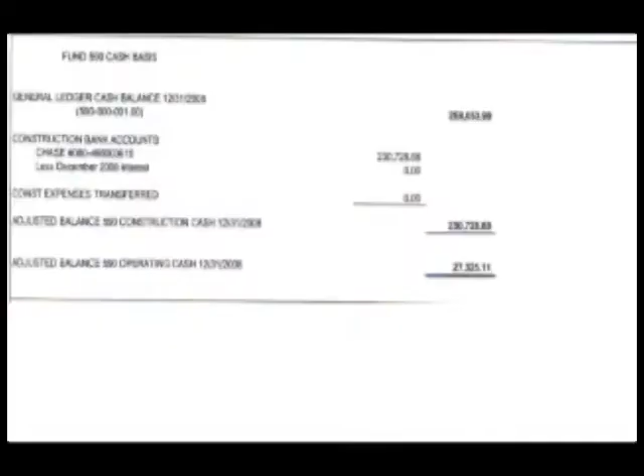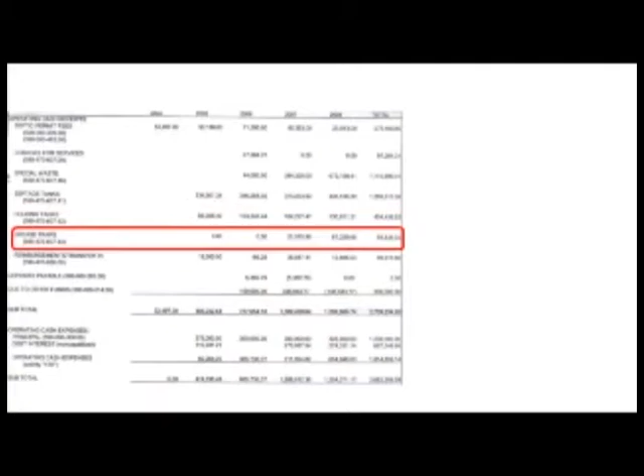The septage facility had some real problems during construction, but now it's online and is taking wastes from groundwater contaminations, septage tanks, holding tanks, and grease traps. The facility is located at the top of Lafreniere Hill, right next door to the County Road Commission. The remainder of the video has to do with why the project was necessary and how the facility itself actually works.

I'm Fred Kiesler, Health Officer, Grand Traverse County Health Department. A little of the history behind the septage plant was the need for one. Back in the 80s, early 90s, it was recognized that we were running out of places for disposal of septage, that is, the waste from septic tanks. Back at that time, the sewage treatment plant was discouraging the disposal of that waste because it could cause problems for the plant.

So they had gone to land application, that is, dumping the septage onto the land and then disking it in. A lot of people were concerned about that: the effect on the groundwater, runoff into surface bodies of water, and just a little bit of a not in my backyard issue. When there was application for a septage disposal site in the southern part of the county, there was quite an uproar of the community, the people not wanting it there.

And when the townships banded together to discuss this issue of what to do with septage, the health department certainly supported the notion that there be a common place where the septage could be disposed of. Wasn't there a state law that changed that suddenly made it a lot more difficult to dispose of the septage?

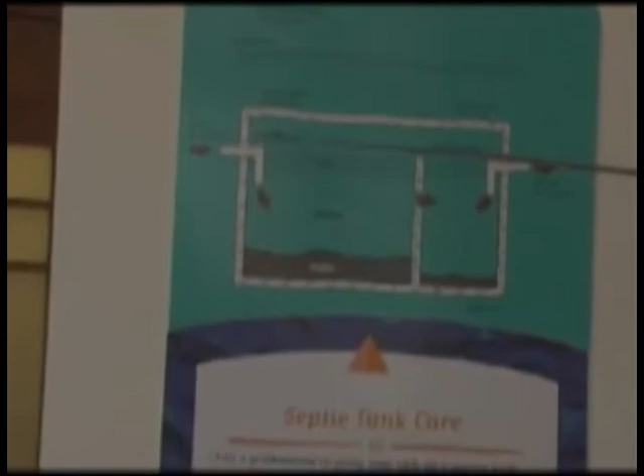Okay. The first diagram that we have shows a cross-section of a septic tank. And if you look over here, you can see that the waste that comes from the house, which is liquid and solid, comes into the system and will essentially deposit inside the tank.

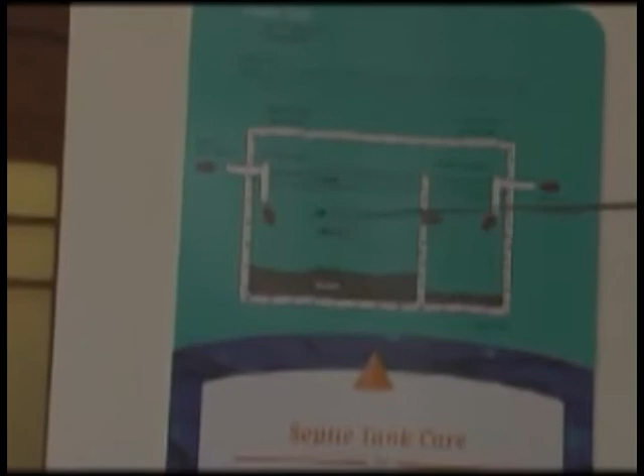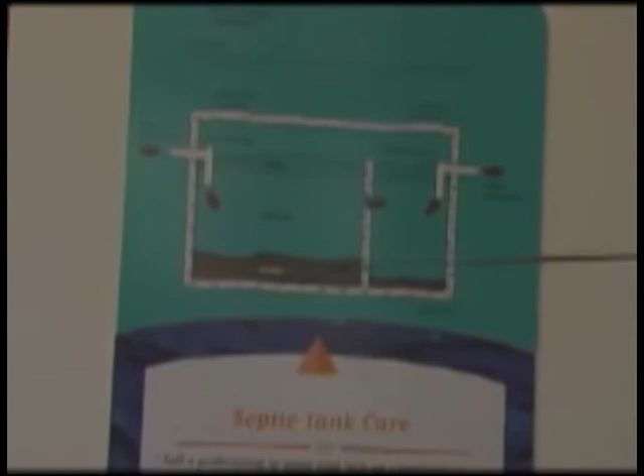What happens over time is that there is a separation between the solids and the liquids. The liquids have a tendency to flow through the system and flow out into essentially a drainage bed that is laid out in your yard. The remaining part of it, the sludge, remains in the bottom end of the tank. And over time, the sludge will continue to build up.

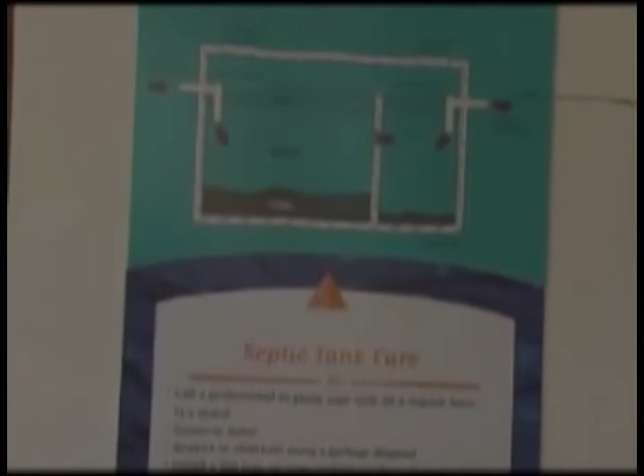And what needs to happen every 3 to 5 years is that the homeowner should pump their tank. When you pump the tank, it removes the sludge that's in the system and makes sure that the sludge does not go out into the drainage system. If the sludge goes out into the drainage system, it will plug up, and that usually means replacing the drainage system, the tile system that's out here.

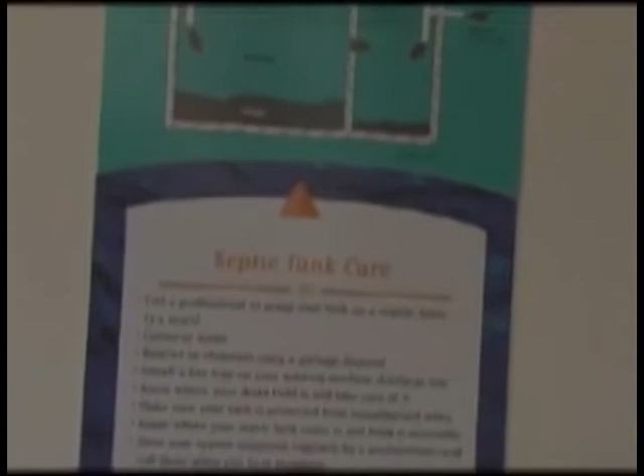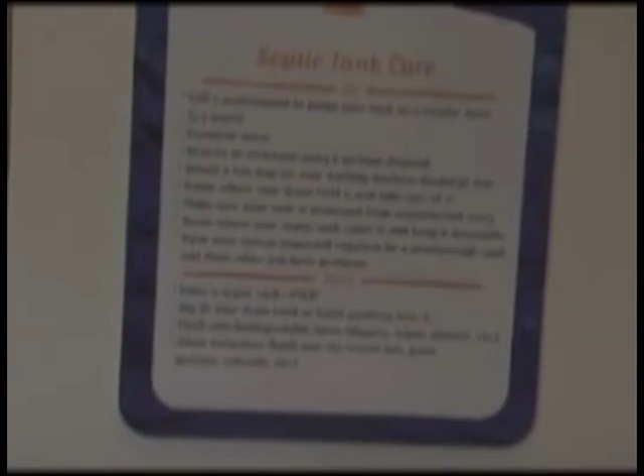And when you do that, that's a fairly costly expense. You're looking at something in the range of $10,000. So certainly properly maintaining your septic system is vitally important if you're on a septic system. Most people don't know that they're on a septic system. How do you find out? Essentially, wait for a sewer bill or call your township. If the township does not send you a sewer bill, then you are on a septic system.

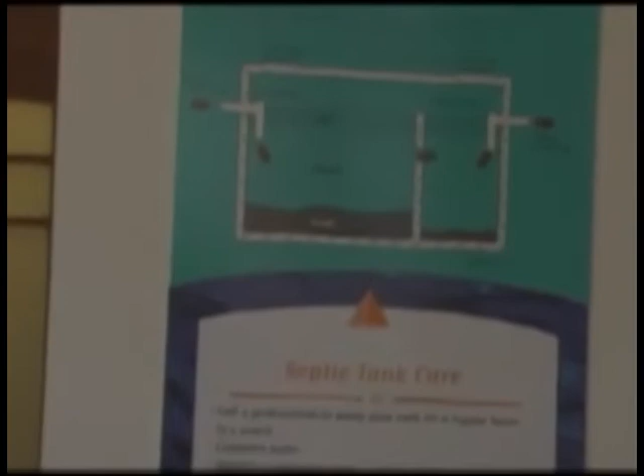It's important to find out where that particular system is located, so what you can do is contact the county where you reside and talk to the health office, and they can actually provide you with a map of your home that determines where that septic system is in relation to your house. And once you find that, then you can dig it out and pump it.

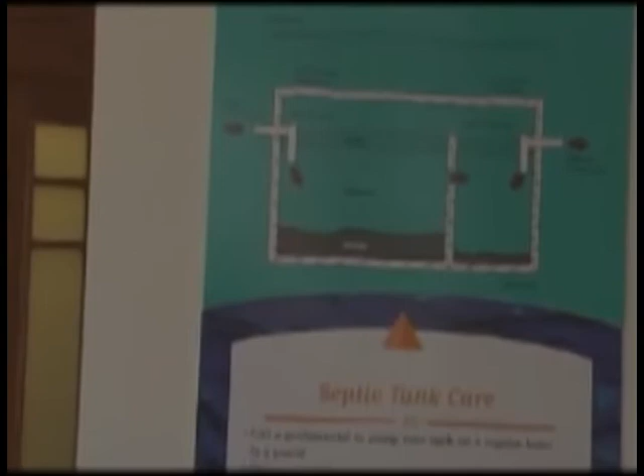Okay. What about protecting our environment, this visual over here? The primary focus with the townships, the 5 townships that we talked about, Acme, East Bay, Elmwood, and Peninsula Township, was to protect the environment and make sure that the water that we have in our area is clean. The wastewater system went through a $33 million upgrade, and in that upgrade process, we made sure that we deposit the cleanest water out into West Bay that we possibly can.

The Septage Treatment Facility in Grand Traverse County is another facility that does essentially the same thing. It treats water to a very high quality level, and it discharges water that is very clean, exceptionally clean, and makes sure that our environment stays very clear and clean.

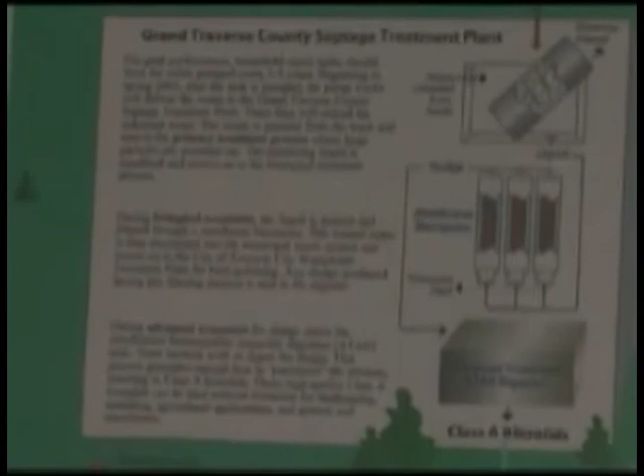Now, are those 2 plants connected? Yes. The Septage Treatment Facility, when it discharges, will discharge out of this building into a tank out here, and eventually that tank will discharge down a sewer line. That sewer line eventually goes to the city wastewater treatment plant, and that city wastewater treatment plant ultimately discharges out into West Bay.

Okay, what's this on the bottom here? This is a picture of what the standard was before we built our septage treatment facility. Basically, a hauler would drive out into a field somewhere, open up the valve in the back of the truck, and let whatever is in his tank fall out onto the ground. Were you running out of land, or what happened? Yes, we were running out of locations to do this, so Grand Traverse County and the 5 townships looked at building this facility to address the space issue, and also because there were problems with the methodology and how the waste was being applied to land.

There were situations where it was applied in the wintertime on frozen ground. There were situations where it was applied on land and it was not properly plowed into the field, or it was not applied at a proper agricultural rate. In those situations, it overloaded the soil. It allowed this waste to disperse and spread across the land. And it was common for somebody's Labrador Retriever or other dog to go out and roll in it and come back into a house. So, it wasn't a clean situation?

No, it was an extremely dirty situation, and the solution for Grand Traverse County was to build the septage treatment facility and provide the cleanest treatment that we can provide, and also make sure that we keep the water as clean as we can, because we realize that clean water is a big part of our community, and it's a big part of our future economically as well as socially.

Okay, we're in the parking lot of the septage facility now. Pretty straightforward industrial style building.

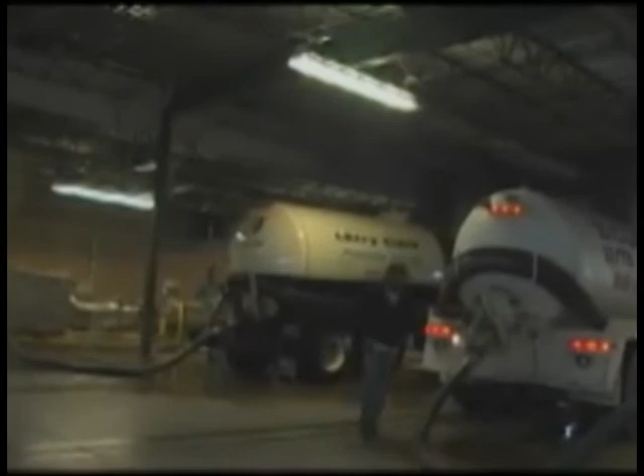Well, Chris, we just had a truck pull in. Can we go take a look at it? Well, okay, so the trucks pull straight in and... Yes. Yeah. We have a card that will access the panel to open up the garage door. So it's all automated then, huh? Yeah. Then everything will start flowing through the system.

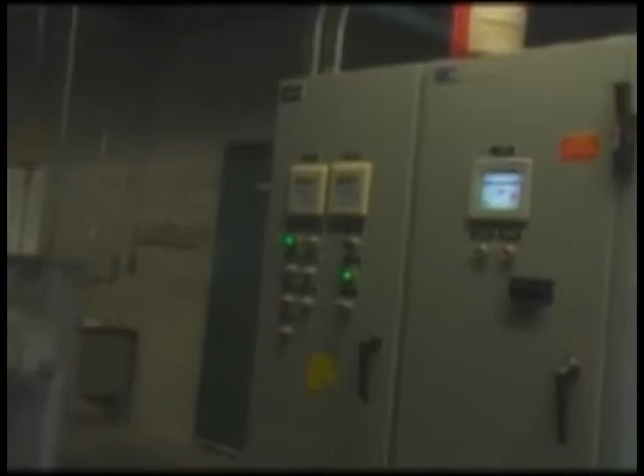Okay, now this is a big... I'll let Scott explain all this. This is a holding tank. Okay, so basically the septic tank is what you showed us in the office. Yes. That's different than a holding tank, right? Yes. A septic tank has a tank, and it also has a drain field. A holding tank is just a tank in the ground, no drain field. There's no place for it to drain out in somebody's yard. So the holding tank, 5 or 10 times a year you got to pump it, where a septic tank every 3 to 5 years. Yes. Septic tank you pump every 3 to 5 years. Holding tank, depending on usage, could get pumped every month.

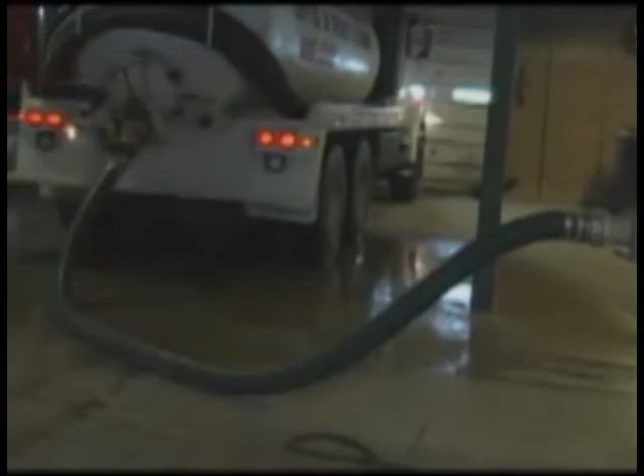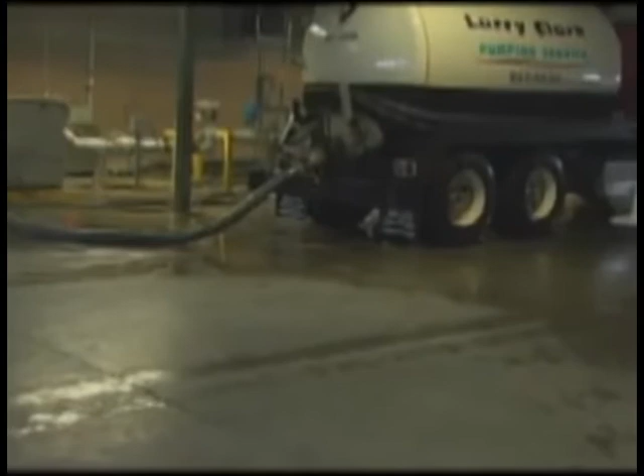Okay, so if somebody's buying a house, they need to pay attention to whether it's a holding tank or a septic tank. If you're buying a house, you need to look at how low the ground is in relation to a body of water. If you're living next to a stream, a lake, a pond or swamp, you might have a holding tank. It's even possible to have a holding tank at very high ground, just depending on how poor the soils are for drainage. So one of the more important things to do when you're looking at a home is to go to the health department and find out whether they're connected to the sewer or they have a septic tank or holding tank. Okay, great.

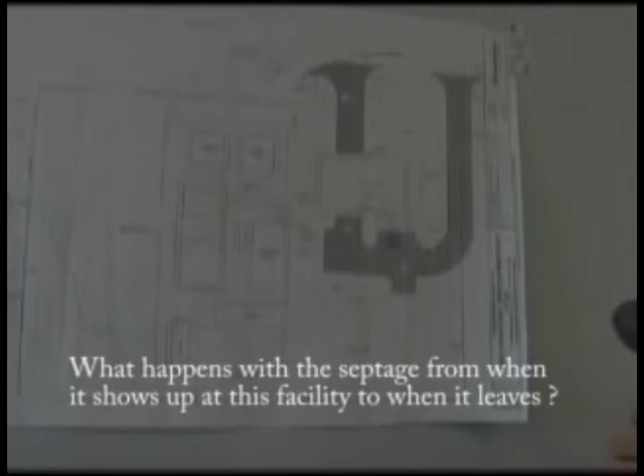Tell me, what happens with the septage from the time the trucks show up at the facility to when it leaves the facility? Okay. First of all, the material is unloaded in this building here, in one of 2 unloading bays. From here, it travels to our influent equalization tank, where it sits and waits to be processed. When the process calls for it, it's pumped from the equalization tank to this building here, to a fine screening system, and then from this building, it's pumped to our aeration tank. The aeration tank is where the bulk of the treatment happens.

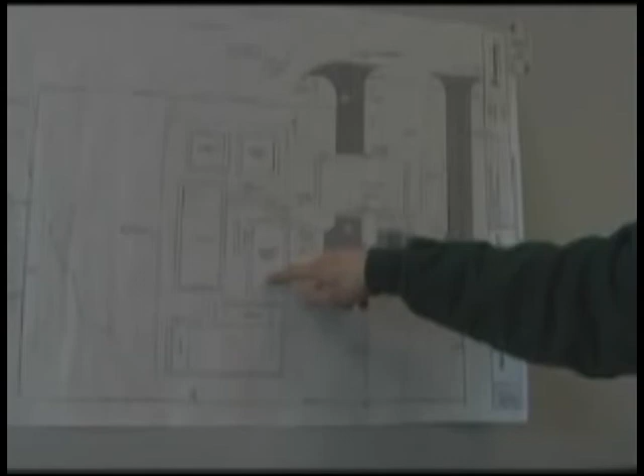From here, it splits into two different directions. The clean water goes out through the membranes and into our post-equalization tank, and then eventually out into the sewer and down to the main sewer treatment plant. The other direction, the sludge that's created in the treatment process, comes back to this building, gets dewatered, and then goes to the ATAD for solids treatment. What's an ATAD? ATAD stands for Autothermal Thermophilic Aerobic Digester. It basically cooks the sludge, the biological processes.

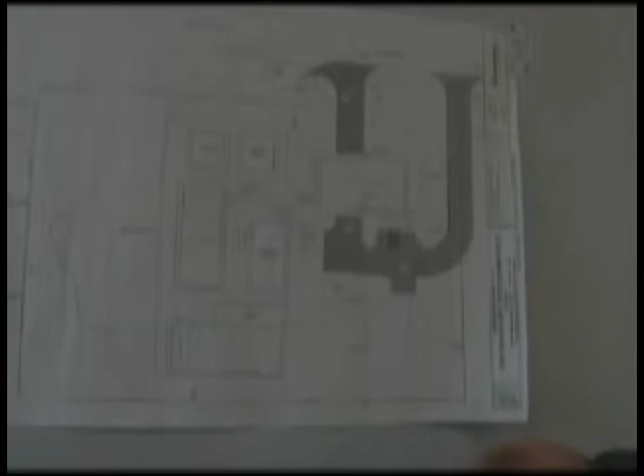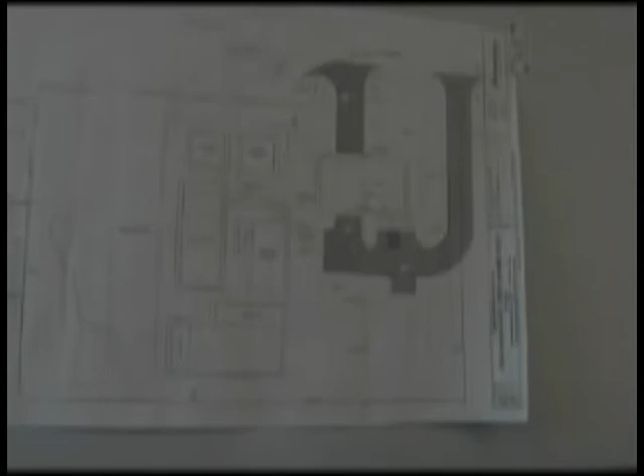So you're trying to create something useful out of the sludge then? Well, creating something useful is an interesting side effect of it. The main purpose of it is to destroy pathogens and harmful bacteria that are still present in the sludge. Okay, so basically that ugly-looking septage that we saw coming in gets cleaned up. Yes. At the end of the process. Okay, anything else? Well, without going into too much detail, no.

I'm actually recording right now, but what did you say about the Bay Harbor? You may not be able to be with us for the whole tour.

Bay Harbor, you're sampling a truck? Yeah, we get loads of the water from Bay Harbor every day, and once a month I collect a composite sample from those loads and do an analysis on it. Okay, well, what's Bay Harbor? Bay Harbor is the leachate that CMS Energy is collecting in Petoskey, part of that cleanup. Okay, so there was a groundwater contamination, and you're taking the water from that? We're taking some of the water from it.

It's the groundwater cleanup from all that kiln dust from the cement factory. All those years that they had just buried it in the ground contaminated the groundwater. And so we're getting the best of what they have. I mean, the water's still got contamination in it, but the stuff that we're taking is the cleanest that they have.

So your processing can actually clean up that kind of water too then? To some degree. Actually, we don't treat any of that water at this facility. It just unloads here, mixes with our water, and then travels down to the main plant for treatment.

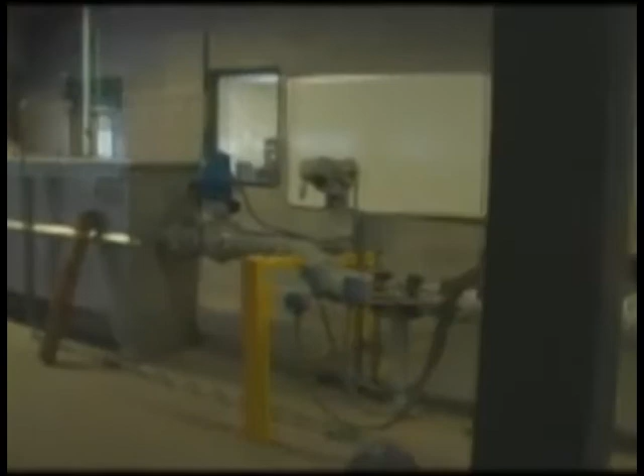When they're ready, they can start. The computer will release a valve in this pipe and allow the material to start flowing through the system. The material comes through this pipe here, and into the rock trap there. And then after the rock trap, there's our monitoring equipment, the little ring with the blue top. That's called a mag meter, or a magnetic flow meter. That measures the speed and helps to totalize the amount of gallons unloaded. And then those three things are probes that measure ORP, pH, and conductivity, three properties that we monitor. You're doing chemical testing at that point? We're monitoring some of the properties of the material that's being unloaded.

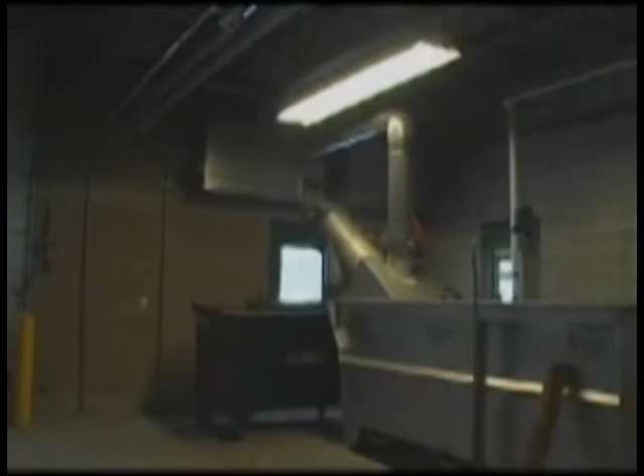Okay, good. And then after it runs by there, it drops into the coarse screen. That coarse screen removes all the material in the water that is larger than 1/4 of an inch. Okay. Cool. From there, all the junk that it removes falls into the dumpster. Everything else goes through a pipe on the bottom of the screen and flows down to the influent tank. The material will come underground from that building into the east half, or the right half, of this tank. Our influent tank and effluent tank actually share a wall, and they're both underground. But the right-hand side of this tank, pretty much from that little blue structure over, is the influent side of this tank.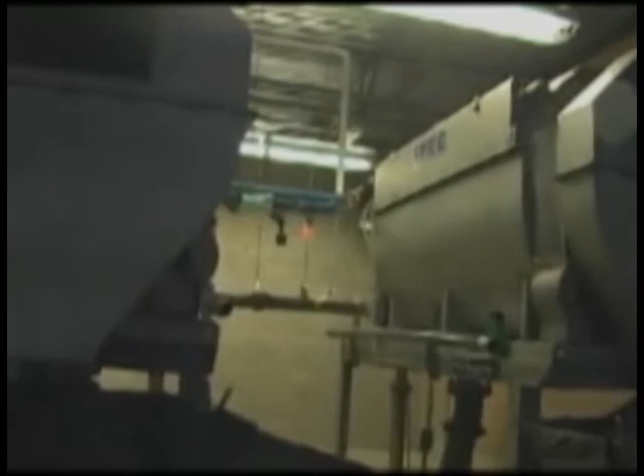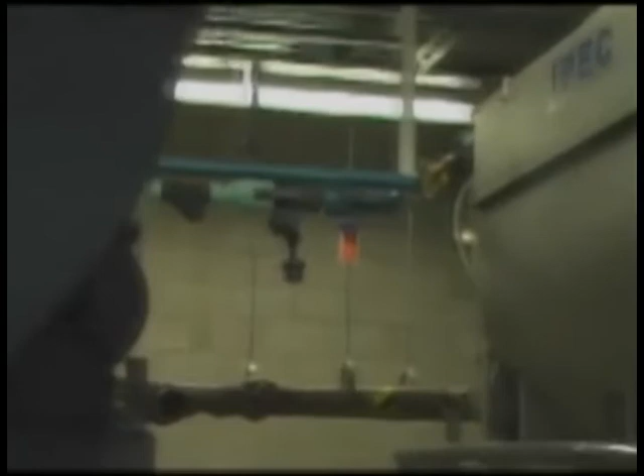Okay. And like I said, that's where it sits and just kind of bubbles until the pumps call for it, or until the process calls for it, and then it's pumped down under the ground here into the building behind us. The pipe there in the back is where the material comes in from the influent equalization tank. That brown pipe comes in and is divided between these two screens. These two are called our fine screening system. They're the ones that remove everything larger than 1/2 millimeter that made it through the first screen.

So it's 1/2 millimeter to 1/4 of an inch. Okay, so we have two of these here. Yes. Okay, very good. After the screens, the pipes on the very bottom, that's where all the water that makes it through the screens goes, and it drops into a lift station on the back side of the plant. I would at this point call the material fine screen filtrate, or screened influent, because all of that material has been removed to a certain size.

Yeah, let's go this way. I don't need to show you the lift station. That tank right there, the white half of the building, that is the side of the aeration tank. Okay, so where it begins white is your aeration tank. Yeah. That's where the fine screen filtrate or the screened influent gets pumped into that tank with the population of biology that we have in there to do the treatment.

So you mix the air with the bugs in that tank. Yes. Aeration, bacteria. Okay. Good. And in that environment, the biology that lives in that tank does all the treatment for us. Okay. Very good.

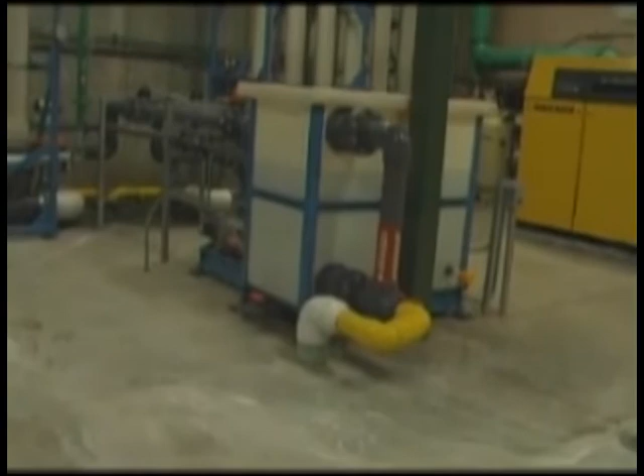Okay, and what's this thing in the middle here? The box in the middle is our permeate box. The gray pipes there are the permeate that's coming off. That's the clean water being collected, falling out of the membranes. It collects in this box briefly before it falls through another pipe and goes out to the post-EQ tank.

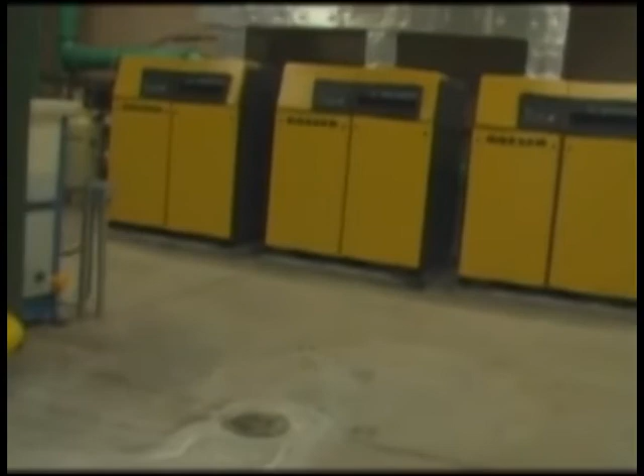Okay, and what are these big things over here, the Kaesers? Those are the blowers that provide the air and mixing for the MBR tanks. And to get the bugs to grow, you gotta add air, right? Right. The kind of biology that we want is aerobic biology, so we have to provide them with air. Okay. And what's this over here? It looks like a big power supply.

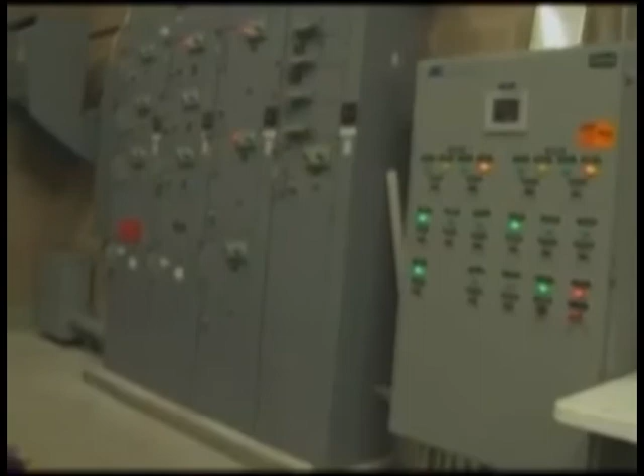That panel there, the MCC panel, MCC stands for Motor Control Center, and that's where all the power for each piece of equipment in this room runs through. Okay, and what's this panel on the right here? That is the control panel, where if we wanted to manually manipulate any valves or processes, we could do it from there. We can start the process from there. It's where the process takes its cues from the programming in the computers and electronics in that panel.

Okay, so the computers run this. It's the exception when you have to use this here. Some parts of this process are not totally automated, so some parts I have to come out and physically start and manipulate. Others are automated, and I just have to tell them to start. Okay, we're going over to the ATAD.

And what does that ATAD mean again? Autothermal thermophilic aerobic digester. So if you break it apart, autothermal means that it generates its own heat. Thermophilic is a general type of biology that means that the biology that operates inside that tank likes heat, specifically heat of around 130 degrees Fahrenheit or more.

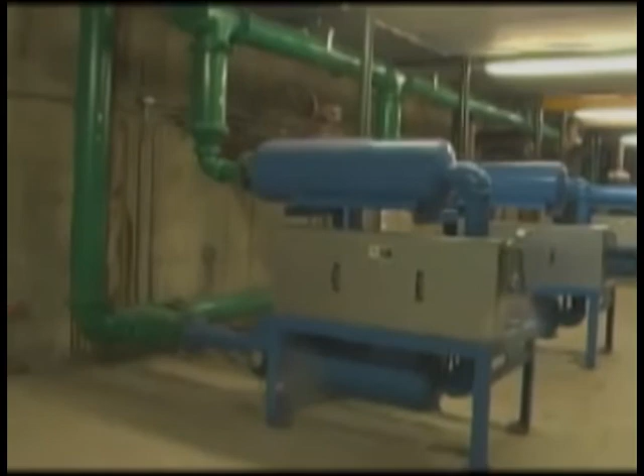This is the upper half of the ATAD, called our blower room. These 4 blue units here provide air for the various parts of the ATAD. The first 2 provide the air for what we call the reaction tank, which is where all that digestion I was talking about, the pathogen reduction, happens. The air for that particular tank comes from these 2 blowers. Okay.

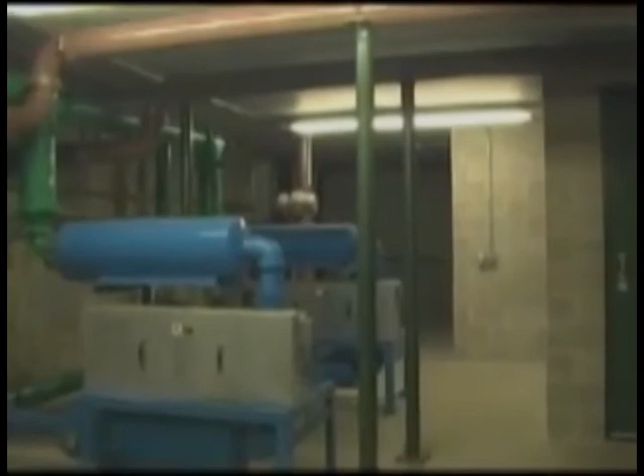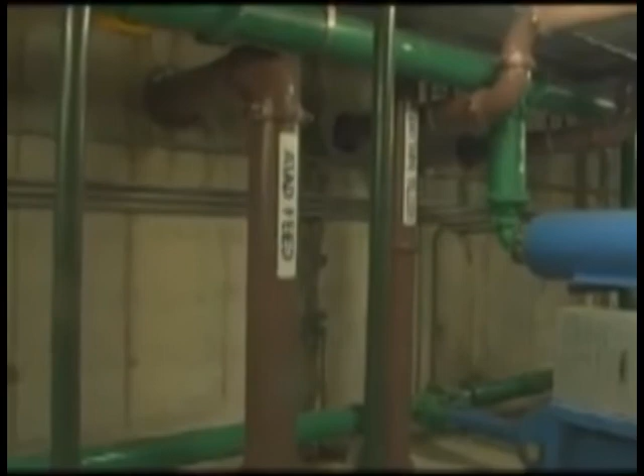The second 2 blowers provide air for the second tank in here. There's actually 3 tanks involved in this whole process. The middle tank in the process is just a holding tank, much like how the influent tank holds material until the rest of the process needs it. Our day tank, it's called, just holds sludge and grease until the ATAD wants it, or until the reaction tank wants it.

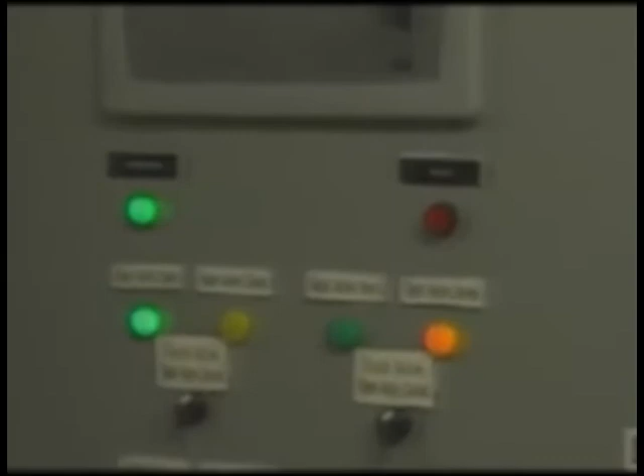After the reaction tank is done treating the material, it goes to the third tank, the storage tank, and these last two blowers provide air to that storage tank. This is where all the brains of the ATAD are kept. The computers that monitor how quickly the pumps are running, and the sensors that are monitoring the different processes, they all come through and are housed in this room.

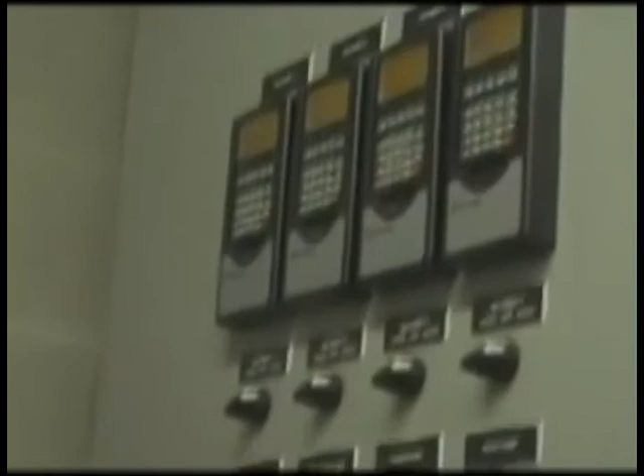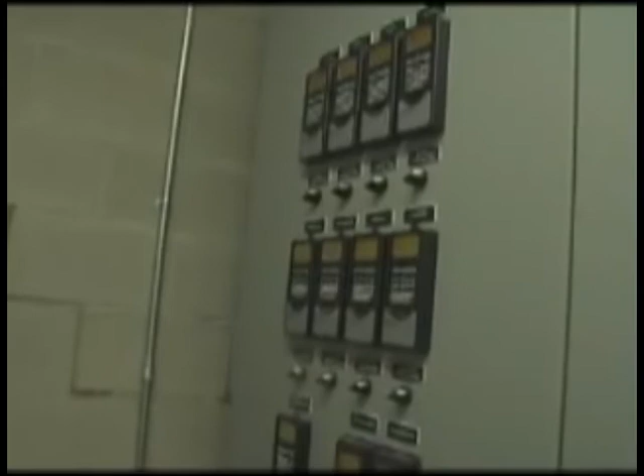What's this up here? These are VFD readouts. VFD stands for a variable frequency drive. One way to help save power and wear and tear on equipment is to modify how hard it's working. Like the pumps, for example, don't always need to be running full out as hard as they can.

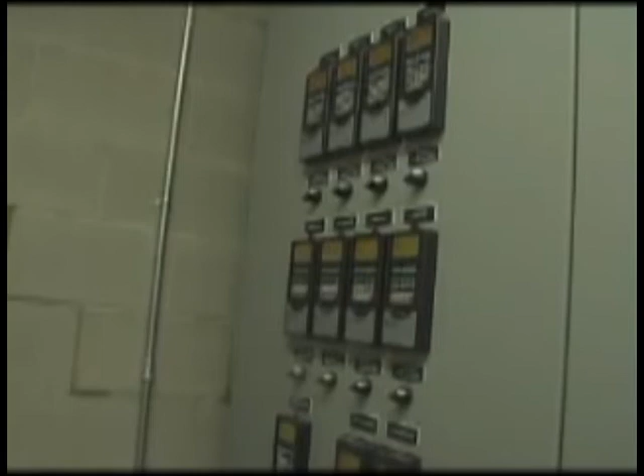And so at times, when the correct signals come from the probes and sensors that we have in place, when those sensors tell us that treatment is basically done, then the computers can tell the pumps, okay, we don't need to run as hard as we were, and so these VFDs will ramp down how hard those pumps are pumping.

Downstairs is where the pumps are that do the various tasks that we need in this process. They're mostly just mix pumps because, as I said, the mixing is a very important part of treatment. You have to have a uniform environment in the tank so that the biology can act in the same way in all parts of the tank. And it's really loud down here. Really loud, okay.

You can get a good overview from the stairs if you like, or we can get right down on the floor. What am I looking at here? You're looking at the mix pumps. This is the ATAD's mix pump, the reaction tank mix pump. It's a 100 horsepower pump. It can move the sludge in that reaction tank very fast. Okay. And what about this foam pump?

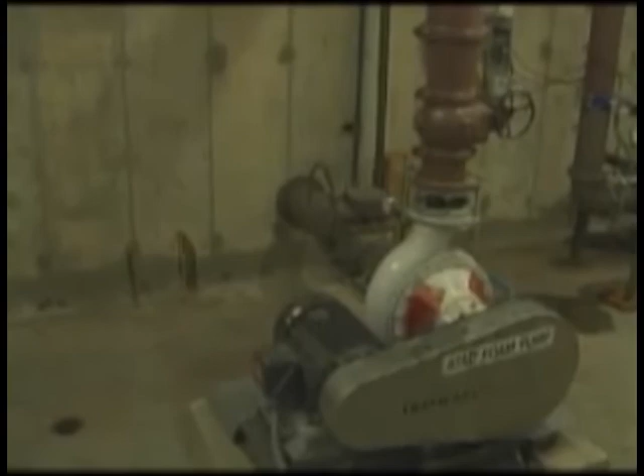What's that do? Part of the mixing and the treatment of breaking down the biology in the reaction tank creates a foam. And if we just let it go unchecked, it would bubble up out of the top of the tank and make an enormous mess. So you're pumping the foam off with this pump? Actually, this pump pulls sludge exactly in the same way that the mix pump does, except instead of injecting it right back into the tank for mixing, the foam pump sends it to the top of the tank to some nozzles and blows the liquid back down on top of the foam to break the foam up.

What's this do over here? The blue pump there is the day tank pump, and that is pumping right now. It's pumping material from that day tank, that holding tank, into the reaction tank for new treatment. And then that final pump on the far side is the storage tank's mix pump, where the storage tank has the sludge that's already been treated. It's just turning it over, keeping the biology moving, and there actually is a little bit more treatment that happens in that storage tank.

But it's pretty much a wrap when it goes through this brown pump then. What's that? It's pretty much a wrap when it goes through the brown pump. Yeah, when it goes through that fourth pump over there, it's pretty much done. Well, thanks a lot, Ken. Is there anything else that we haven't covered here?

The only other thing that we haven't talked about is the odor control system that we have. It's actually a very sophisticated system. It's also one of the reasons why we weren't able to actually look at any of the sludges, was because they're all in enclosed tanks, and the foul air fans draw the foul air off of those tanks, and it pulls it all through ductwork throughout the whole plant. Sometimes above ground, sometimes below.